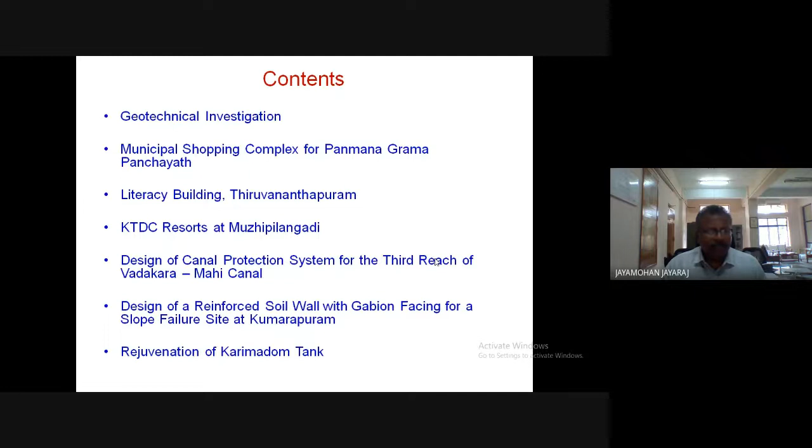This is an overview of the presentation. I'll talk a few words about geotechnical investigation initially. Then I'll share some of my experiences in projects regarding one municipal shopping complex at Panmana Panchayat, and some buildings and canals in various parts of Kerala.

All of our faculty members will be familiar with this term, geotechnical investigation. This is performed by civil engineers or geotech engineers, basically to obtain information about the properties of soil and rock at site. This information is required for various purposes — for planning construction activities, for designing the foundation, and if it is a soil structure, to design and monitor it, and to analyze the safety of existing structures.

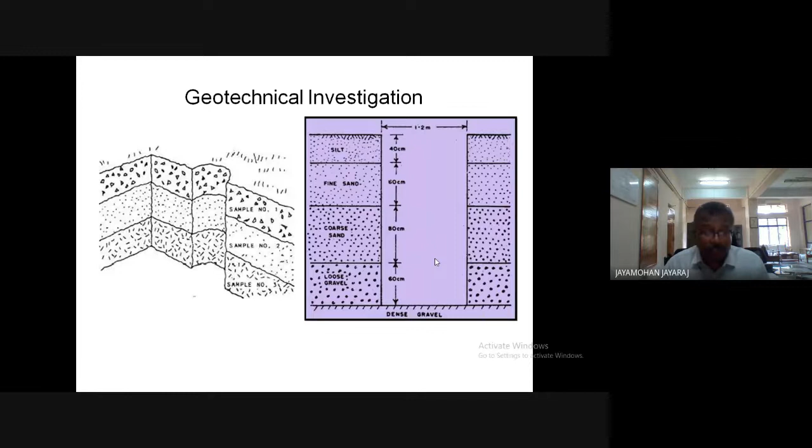Fundamentally, what we require is to know about the various layers of soil at the site. We need to know the properties, and if it is an earthquake-prone area, we also have to determine the dynamic properties like coefficient of elastic uniform compression, etc.

Usually the most common practice is we drill boreholes, take samples at various levels from all layers beneath, and do tests to find out properties. If the project is on a large scale, sometimes we may also have to go for geophysical methods of investigation. Now coming to the case studies, I'll start with a project.

This is in a district called Kollam in Kerala. It's a rural area, a Grama Panchayat — a village panchayat called Panmana. They were planning to construct a municipal shopping complex, and we were the total consultants. We did the surveying part, the initial survey, the architecture design, geotechnical investigation, and even the structure design — everything was done by our civil engineering department.

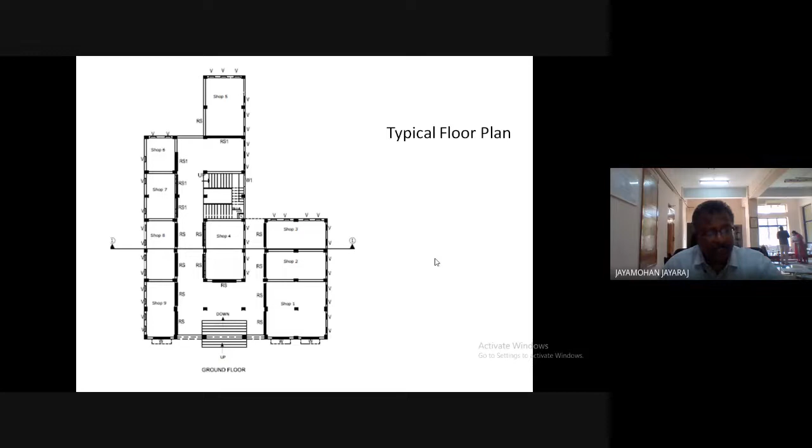So to stabilize the sides of the borehole, we use a solution made with bentonite. Bentonite is a type of clay having a mineral called sodium montmorillonite. That is the mineral in bentonite.

So we mix bentonite with water. I will show you some photographs. We mix bentonite with water to form a solution which will be circulated inside the borehole.

Can you see the movement of my cursor? Is the movement of the cursor visible? Yes sir, yes sir, it's fine, visible.

So here you can see this is the drill rod. These equipments are mounted on a tripod. Basically it is a gear drive. Here there is a main engine, and on the side there is a single gear. From that gear there are 4 belt drives. With 4 belt drives, 4 other gears are driven, and all the 4 other gears, one is for this pump.

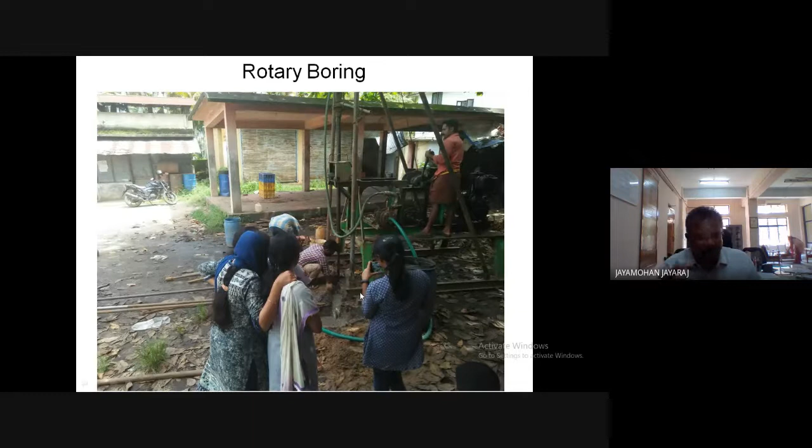Can you see the solution flowing, a muddy, grayish water? Is it visible clearly? Yes, yes. So this is a solution of bentonite. Actually the color is yellowish brown, but when it gets mixed up with local soil, the color changes accordingly.

So this is the borehole. This is a small pit, and here the solution of bentonite will be stored, and from it, it will be pumped into the drilling rod and circulated.

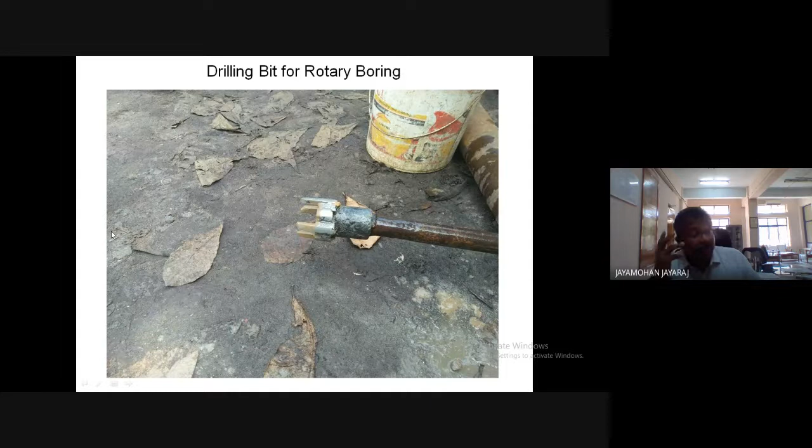So this is the chopping bit used for rotary boring. This chopping or drilling bit is what we use for rotary boring. Whereas when we have to take rock samples, we need a diamond bit, a double core diamond barrel.

What I'll be focusing on in this lecture is: once you get a soil investigation report, how do you choose the type of foundation? How do you choose the depth at which the foundation is to be placed? And how do you find out the bearing capacity? These are the 3 basic aspects I'll be sharing in this lecture.

That is, once a bore log or borehole data is given to you, how do you decide the type of foundation, how do you decide at what depth the foundation must be placed, and how do you decide the bearing capacity? These are the 3 things I'll be sharing.

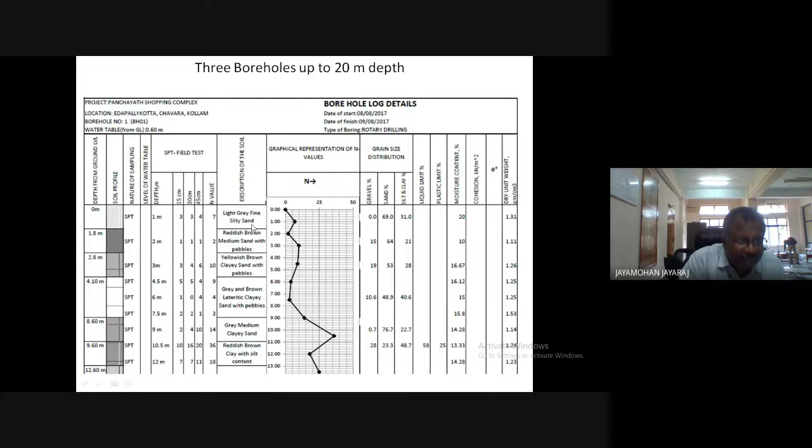As you can see, the topsoil is sandy in nature: light gray fine silty sand, reddish brown medium sand, yellowish brown clay sand. Of course this has a content of clay, this is lateritic clay sand. So predominantly it is sand, this also is clay sand but the major portion is sand.

Now you see the depth of water table, it is 0.6 meter. That is, at this level, where you see my cursor, that is the water table.

And you see the standard penetration resistance values are 7, 2, 10, 9, and 4. From 9 meters onwards it is 14, 36, 18. If you go down further, again 25, 30, more than 50, etc.

To be precise, up to a depth of about 7.5 meters, the N value is 3. From 9 meters onwards it has improved. Up to a depth of 7.5 meters the soil is loose and predominantly sandy, and it is below the water table.

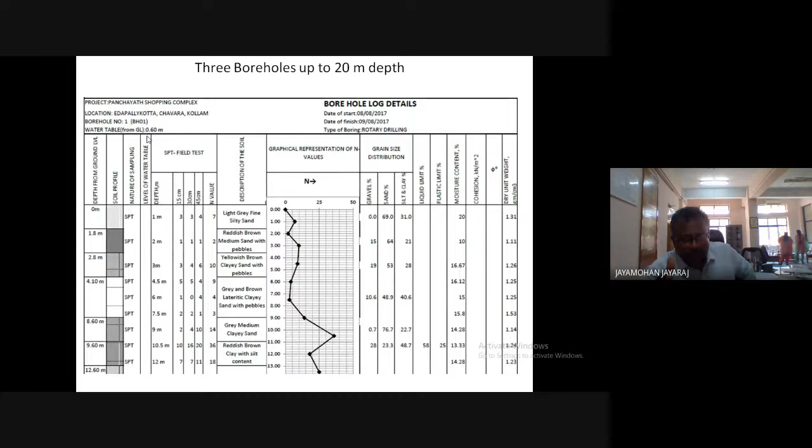So in the previous class, I hope Professor Jaya might have talked to you about liquefaction. Did she mention liquefaction in her lecture? No sir, it is not mentioned.

Liquefaction, oh sorry, I also did not include that in my slide. See, liquefaction is, when ground vibrates, that is during an earthquake, I think I will use my whiteboard for a minute. I'll share my whiteboard.

So we go back to the PPT. Here in the top layers, up to about 7.5 meter, the soil was loose. There was a possibility of liquefaction. Of course that location was not seismically very active, but you know, nowadays the geological conditions are changing.

Places which are not seismically active, nowadays they are active. Many places, especially in our state of Kerala, from my childhood I have never experienced any tremors or earthquakes, but in the recent past, even in my place in Thiruvananthapuram, small shocks and vibrations are being recorded at times. So these geological conditions are changing.

So if there are possibilities of ground vibration, then this liquefaction potential has to be reduced. We must go for compaction. So here also we went for compaction. I'll explain the process of compaction which we designed here, because here we have to compact up to this 7.5 meter depth. So we designed a system of compaction piles.

Now analysis of soil data, recommendation for foundation design. First of all, it is required to densify the soil to a dry density of 1.4 ton per meter cube, approximately 14 kilonewton, because the present density we measured was hardly about 12 kilonewton per meter. We want to increase it to 14. So once you densify, then we can place a foundation at a level of 1.2 meter. This is the method of densification.

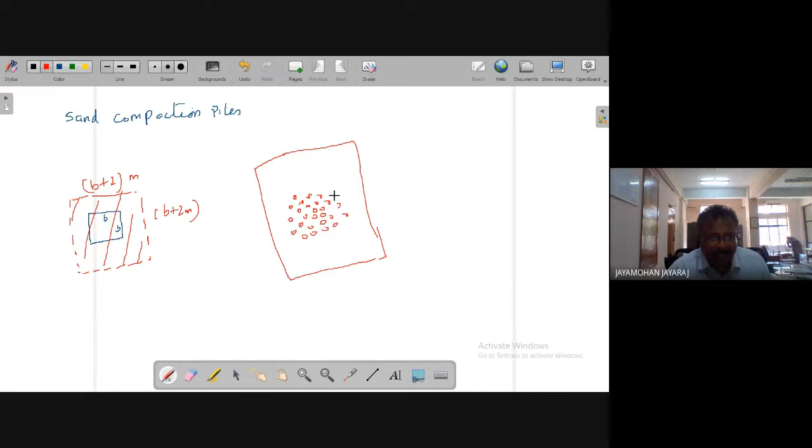We will start from the middle and work outwards in a radial fashion. Always when you go for compaction piles, we must start from the middle and work outwards in a radial fashion. If you do the reverse procedure, initially compacting the external edges and working inwards, as you reach inwards the soil will become so dense you won't be able to drive in your compaction piles.

Now I will explain the method of compaction piles. Suppose this is the ground level. Now I am drawing a section. This is the section. First, we will put a steel cone.

We will put a steel cone on the surface, and above the steel cone, we will put a hollow steel pipe. The pipe will be having joints at intervals of 1 meter. So these are the joints, and then this pipe, we will drive it down.

This pipe we will drive down using a drop hammer. So when you drive down this pipe, like this, what happens is it will push the soil radially outwards, thereby compacting the surrounding soils. So these are the joints in the pipe.

Now the next step is we will pour in a mixture of 6 mm aggregate plus sand in the ratio 2:1. So the infill material is a mixture of 6 mm aggregates and sand in the ratio 2:1.

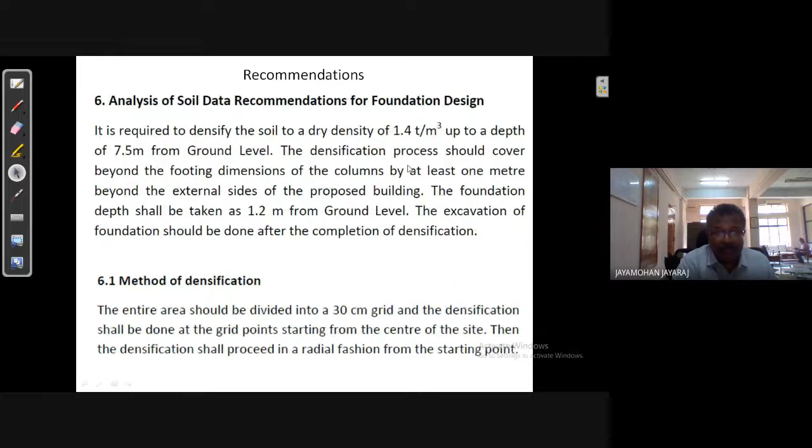So up to the 7.5 meter depth, the entire area was compacted like that, so that we reduce the void ratio or increase the density, so that the static bearing capacity improved. Also, the possibility of liquefaction was eliminated.

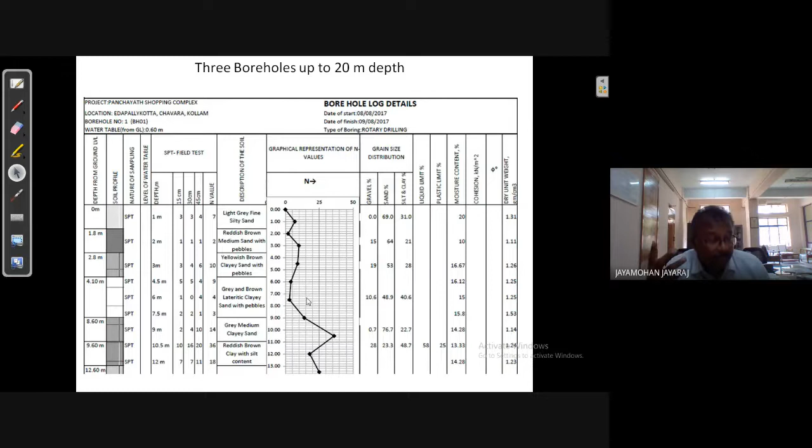So this is mentioned in the PPT. The process of densification is mentioned in this PPT. Whatever I said, I have explained it in detail. You can refer to it, this PPT will be shared with you.

Then once after that, bearing capacity was determined, and based on the density and the shear parameters measured, we got the bearing capacity as 150 kilonewton per meter square. The allowable bearing pressure has to be computed based on two criteria.

One is based on shear strength, you have to refer IS 6403, Indian Standard 6403, that is the code for bearing capacity. Then we have to check for settlement using IS code 8009, to find out the bearing pressure for the permissible settlement.

Whichever is lower, we will take as the allowable bearing pressure. So please note, we will find out the bearing capacity as per Indian Standard 6403 to find the safe bearing capacity. Then to find the safe settlement pressure, that is bearing pressure based on settlement criteria, refer IS 8009 - part 1 is for shallow foundation, part 2 is for deep foundation. Then find both values, take the minimum one as allowable bearing pressure.

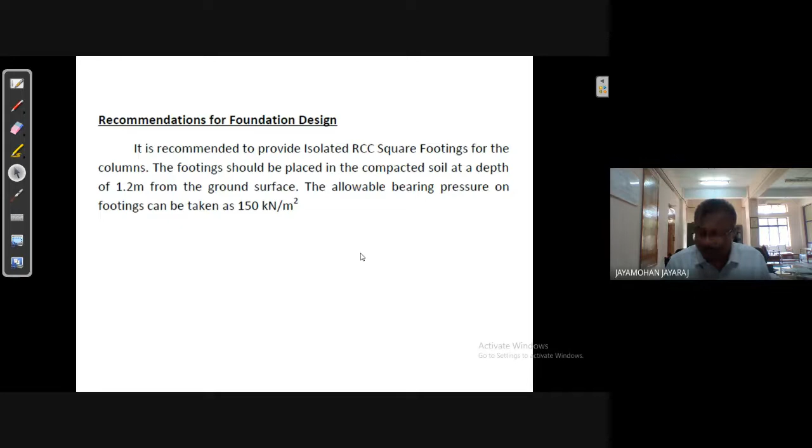That is the procedure to find out this value. Once the densification was over, we wanted to verify and check the amount of densification that occurred. So on the surface, we check density using a sand replacement cone. If you want to check the density at lower portions, you have to do a standard penetration test, but our client was not able to spend that money.

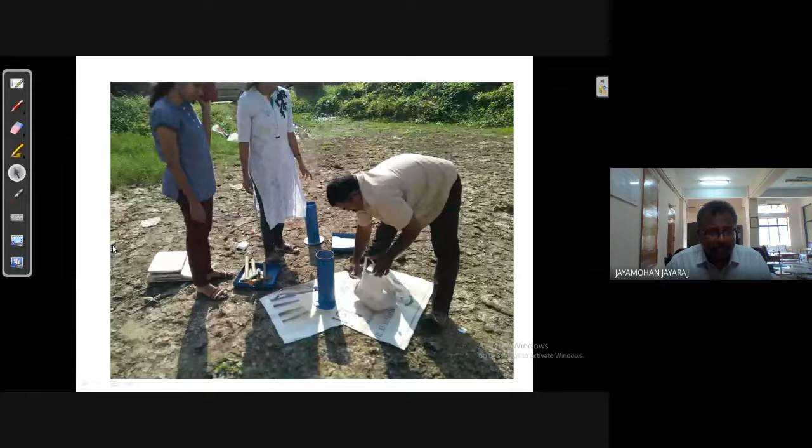And we got a value higher than 14 kilonewton per meter cube.

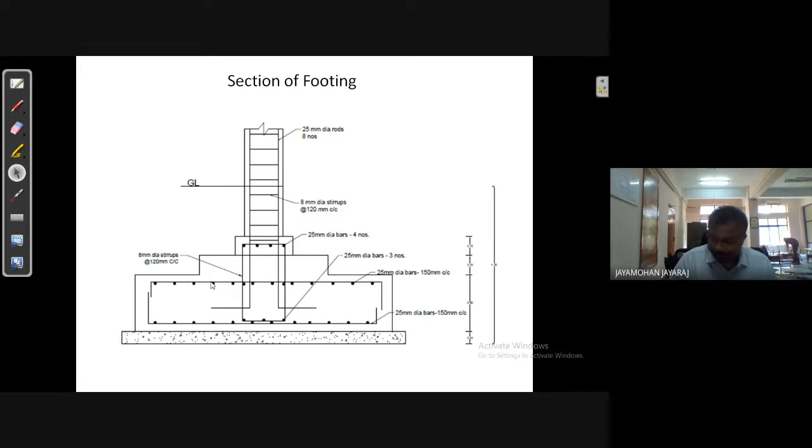Now the next project is at Thiruvananthapuram. That was a building for the literacy mission.

Sometimes there is a basic difference, you know, in how we do these practical works. The first work was given to us by a government department called Local Self-Government Department, so the people we discuss with are engineers. Now this work, it's a government project, but the government had given this project to an architect, a famous architect in Kerala.

The name of the company is called Habitat Group, headed by a very famous architect. You know, sometimes these architects fail to understand the severity of civil engineering problems.

Sometimes they will say whatever you design, whatever solution you give, must be within this much amount of money. The budget or estimate for the system should not exceed so much. This is the problem we face when working with architects, especially when it comes to complicated geotechnical problems. Sometimes, within the money they give, we may not be able to do it.

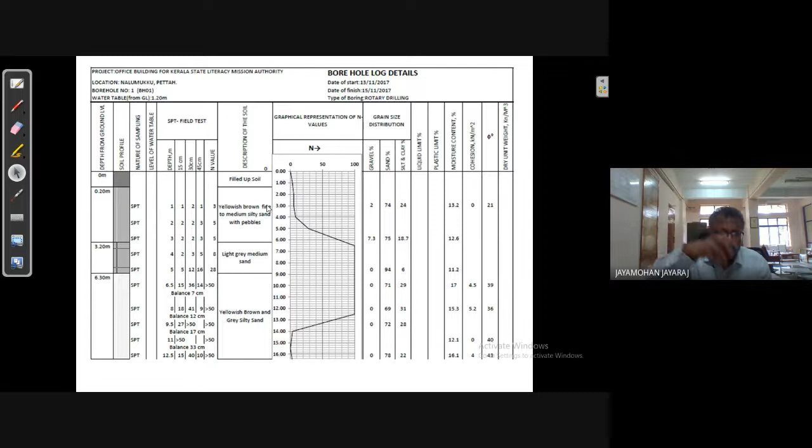Only thing, excavating for 6 meter is a problem because the water table is at a depth of 1.2 meter. This sandy soil is highly permeable, so there will be a lot of water coming in, requiring lot of dewatering. Since this was within Trivandrum city with many houses nearby, massive dewatering would cause cracks in the surrounding houses, leading to other issues as well.

So we recommended—I'll show you the recommendation. This is the rock data, you see these rock pieces. The RQD, rock quality designation, was 50, 59, which was very less and very poor. So this was disintegrated rock.

For soft rock and weathered rock, there is a design procedure as per IS 2911, which we can use to design pile foundations resting on it. Whereas for hard rock, you have to refer IS 14593—anyway, we'll see it later. For weathered rock, IS 2911 gives a procedure based on standard penetration resistance value, but usually it's difficult to do SPT on weathered rock because the value will be very high and the equipment may get damaged easily. So in case of weathered rock, we take it as dense sand with angle of shear resistance more than 40 degrees—that's common practice. Anyway, we'll see it in detail later.

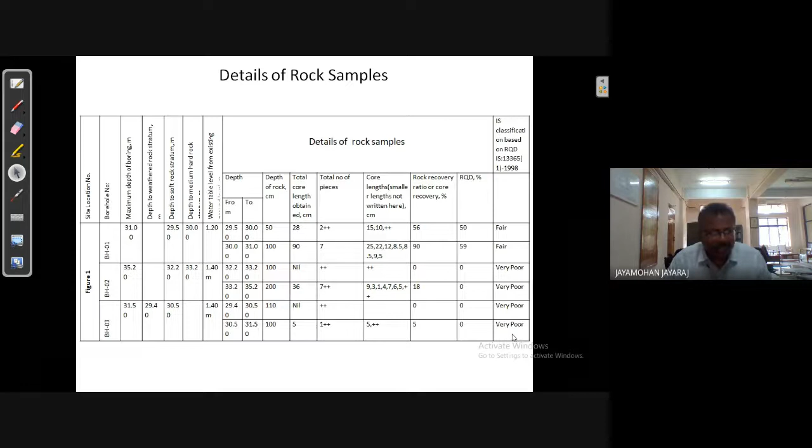So for circular footings, the method is method of excavation. You must lower RCC well rings. Do you know?

Nowadays when you make an open well, we excavate using concrete rings. I hope all of you have seen a concrete well. While installing a well, we use concrete rings, putting them one by one, and inside we excavate.

So here, to prevent the collapse of soil and to prevent large-scale sheet piling, for each foundation it is recommended that you excavate for the foundation as you excavate for a well, up to a depth of 6.3 meters, and there you can have a circular footing. You must then concrete a column, an RCC column, over that, then fill that space using the same sand from the site.

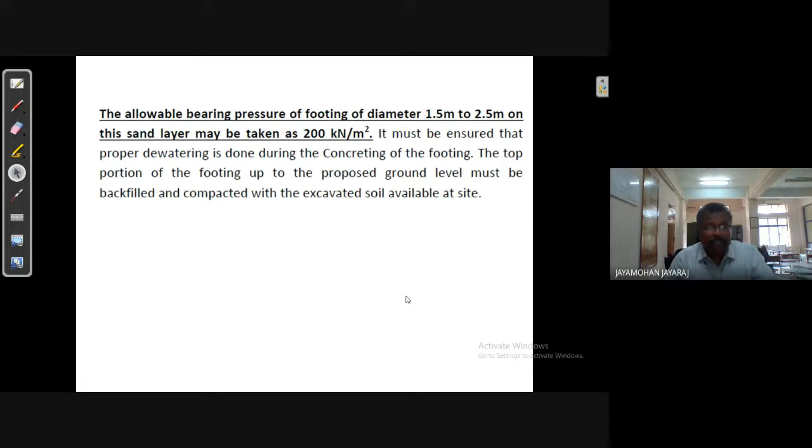So that was the recommendation, option 1, with a bearing capacity of 200 kN per square meter. Option 2 was pile foundation.

But construction like this is very difficult, especially after setting out the foundation points, when you install this well it may tilt or shift, making construction difficult. So finally the architect went for an additional estimate, and later, during the real construction, they installed piles. I gave the bearing capacity of piles also.

So here I get 2 options, but actually the best technical option is the pile foundation.

The problem is, when people apply for funding to government, based on the functional requirement they design the building, and without doing soil investigation, they assume a foundation. With that they make an estimate, make a budget, and submit it to government. Government gives some funds, and only after getting the funds do they go for soil investigation. At that time, if they see an adverse soil condition, the amount they received becomes insufficient, and they have to go for a revised estimate. This happens in many government projects. That is a common practice.

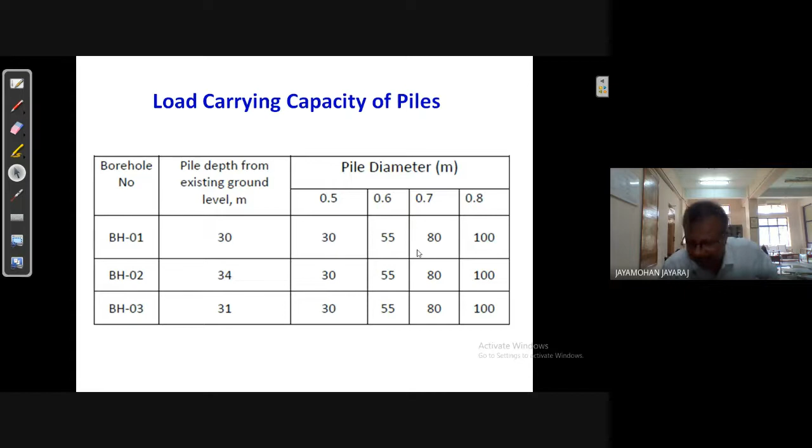Now this is another project for KTDC, the Kerala Tourism Development Corporation. They had a project of resorts at a place called Muzhuppilangadi, which is in North Kerala, near Kannur.

It is famous for something. What is this Muzhuppilangadi famous for? Those participants from Kerala, can you answer? I don't know how many of you know that. Participants from Kerala, can you put it in the chat box?

Yeah, of course. Mr. Jerison James had typed it. So there's a drive-in beach there, and that beach is very famous. So we have a drive-in beach at Muzhuppilangadi.

So this Kerala Tourism Development Corporation wanted to construct a 5-star hotel. The 5-star hotel is a 7-story structure, and all the resorts are single-story. It's a huge land, a very vast land, about more than 5 acres, which is approximately 2.5 hectares.

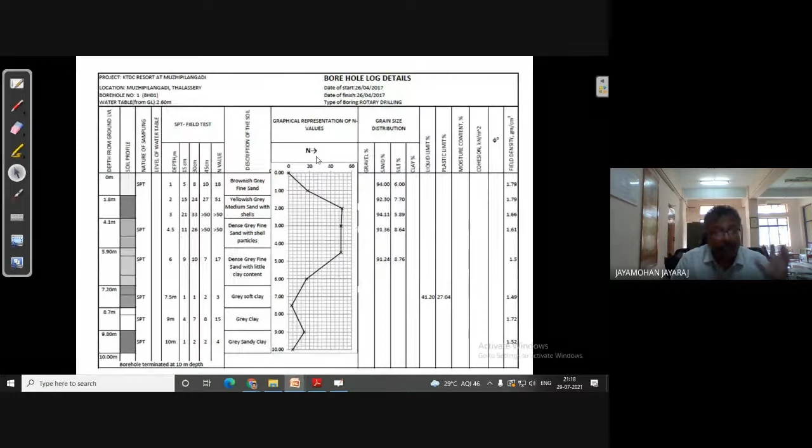Now see here, these are the bore logs which we drilled in the location of the resorts, up to 10 meters. Here also we saw similar results. From 2 meters to 4.5 meters it was dense, above and below was loose. So these are single story buildings, resorts.

Here we placed the foundation at a depth of 1.7 meters, so that the entire pressure bulb falls within the highly dense zone. That was done here.

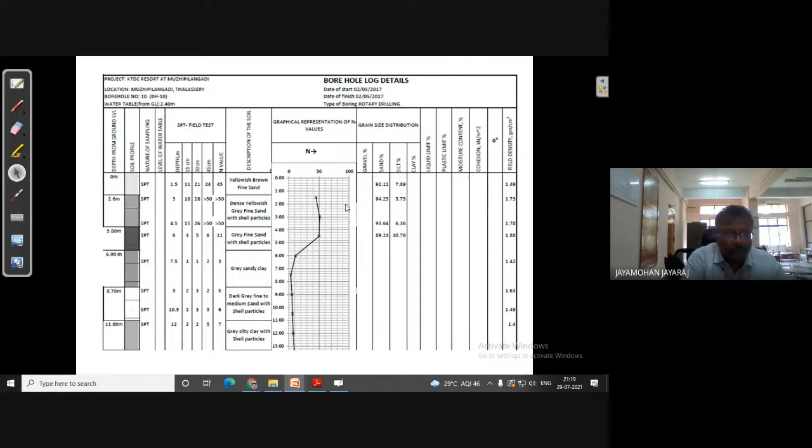And for the 5-star hotel, this is the top zone, then it becomes loose, that comes down, and at a depth of 21 meters we get weathered rock, and below weathered rock we got hard rock. So this was the data for the 5-star hotel.

Now see, this is how we record the details of rock. This is borehole 9, borehole 10. Borehole 1 to 8 was in the location of resorts, and borehole 9 and 10 was in the location of the 5-star hotel. For example, from a depth of 23.33 to 24.1 meters, that is for a length of 80 centimeters, the total length of sample obtained was 0, because that rock was in a powdered form. So the number of pieces, there is no number of pieces.

Rock recovery ratio 0%, rock quality designation 0%. So classification is based on IS 13365, this is rock mass classification. This IS code for rock mass classification, IS 13365, this is very poor. Then from 24.1 to 26.1 meters, the depth of boring was 200 centimeters, 2 meters.

We got the length of sample as 147. So 147 into 100 by 200, as a percentage, 147 of 200 is 73.5%, that is the rock recovery ratio. And there were 9 pieces. So all the lengths of 9 pieces added together will come to 147. 147 divided by 200 multiplied by 100, as a percentage, that is 73.5.

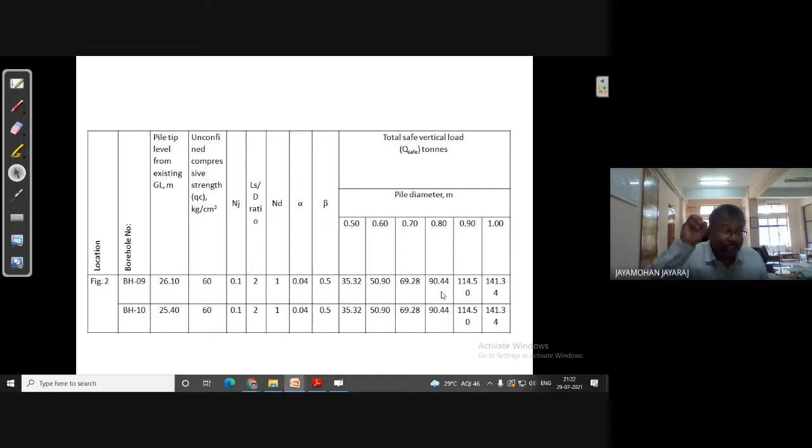Now based on the unconfined compressive strength, we calculate the bearing capacity of pile resting on rock. This is as per IS 14593, this is a different equation. That is the guidelines for piles resting in rock.

So this is the Excel sheet for that. For this, there are some parameters, NJ, ND, based on the spacing of joints, etc. There are 2 parameters, alpha and beta. LS is the socket length of pile inside the rock layer, D is the diameter of pile, so this is the LS by D ratio.

Based on the unconfined compressive strength we got various values. In this pile, in borehole location 9, in the bottom portion it was 77.22. In borehole location 10, bottom portion was 119. So 77 and 119, for design purpose we took a value of 60, and accordingly for piles of various diameters, bearing capacity was computed.

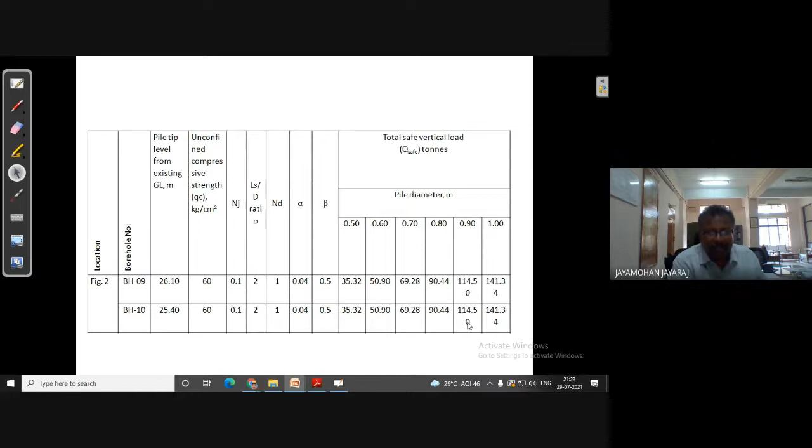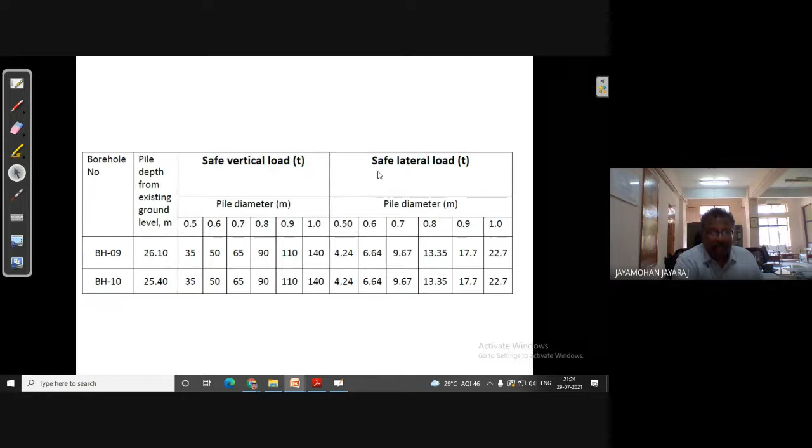Lateral load we have to calculate based on IS 2911. Uplift load based on the buoyant weight. If the pile is below the water table, based on the buoyant weight and based on the friction on sides, we have to calculate uplift load. So that is how these were calculated.

So till now we were discussing about building projects. Now we will discuss about two major projects which involved a lot of complications.

This is a design of canal protection system for the third reach of Vadakara Mahi Canal. These are not from Kerala's capital region. Vadakara is a place in the northern part of Kerala, and both Vadakara and Mahi are there.

Our state, Kerala, is a small state and very densely populated. So to ease the transport through roads, our government is very keen on developing the inland navigation system so that cargo transport can happen through water.

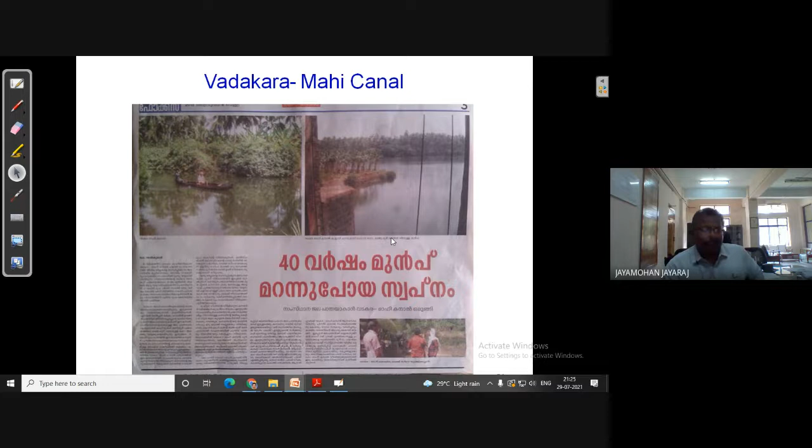This actually started long back. When I searched the internet for the Vadakara Mahi Canal, for those who know Malayalam, it was a dream which started 40 years back, and due to various reasons, mainly difficult soil conditions and budget restrictions, this project could not take off.

But now the work is progressing at a very fast pace. This was part of Vision Vadakara 2025. This canal passes through 3 assembly constituencies called Kuttiyadi, Nadapuram and Vadakara, and the total length of this...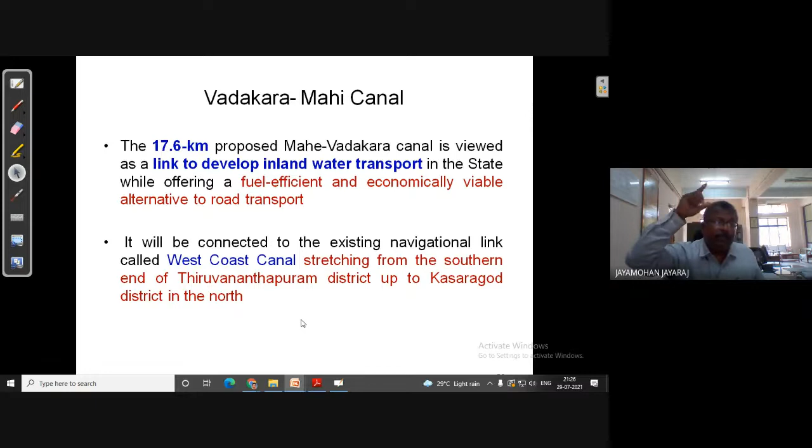An intrinsic network of canals for water transport is being developed throughout the state of Kerala, because Kerala is blessed with a lot of water bodies. This particular canal, Vadakara Mahi Canal, has a length of about 17.6 kilometers, and it is connected to the West Coast Canal, which runs throughout the length of Kerala, from Thiruvananthapuram up to Kasaragod.

The feasibility study was done by a research organization called NATPAC, the National Transportation Planning and Research Center. As per their feasibility study, up to 16.6% of total goods traffic by road can be diverted through water, making the traffic system easier and the goods transported at a more economical rate, with the cost of transportation coming down.

These are the purposes for developing the inland navigation system. Our issue is that this Vadakara Mahi Canal connects the Kuttiady River in the south and Mahe River in the north. These are the geographical aspects. The funding for this has been sanctioned by the 13th Finance Commission of Kerala State.

Now the problem: the work in the entire 17.6 kilometer stretch is going on in full swing, except for one stretch between chainage 458.47 to 459.27, hardly 750 meters or three-quarters of a kilometer. That stretch has got very treacherous soil conditions.

The soil there is very loose and the banks are very high. They are collapsible soil or dispersive soil, which as water flows, the soil gets carried away and collapses easily.

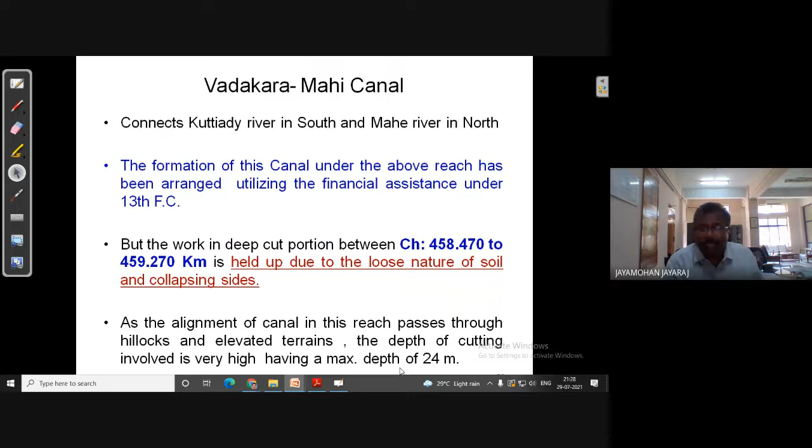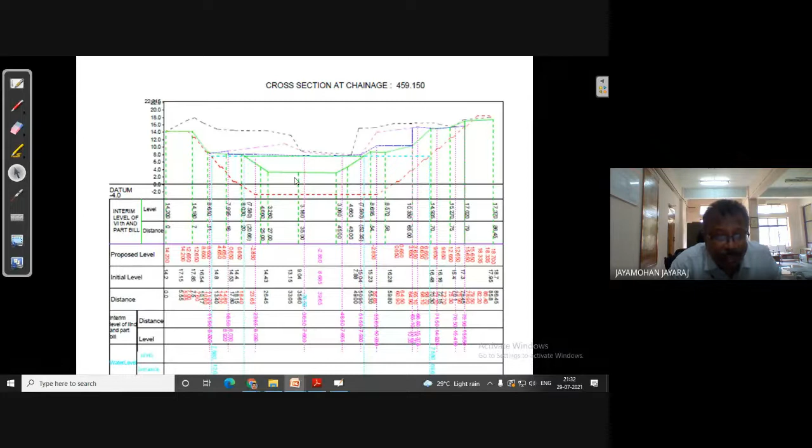That is, when they reach this green level itself, in these areas, soil is collapsing. Soil is collapsible in nature. So when you further excavate till the red line, if soil collapses here, these houses will be in danger. Definitely these houses will collapse into the canal. So the local people started agitating.

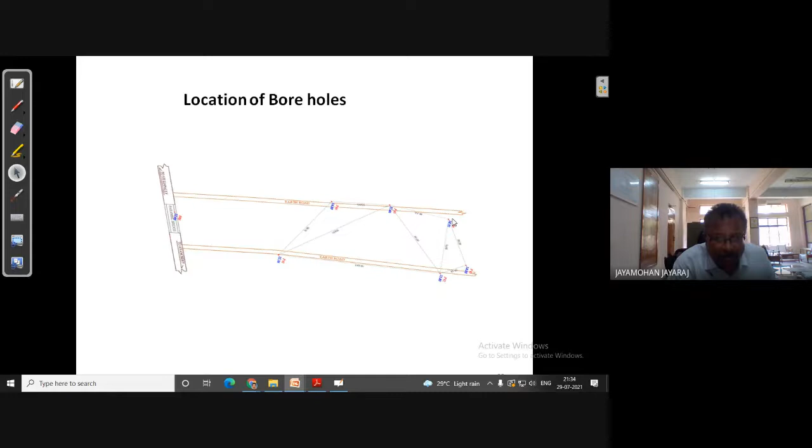This is the left bank - 2 boreholes at the top of left bank, 2 boreholes at the top of right bank, 1 borehole at mid height. Mid height means, I will show in the cross section, somewhere here - 1 borehole at mid height of left bank, 1 borehole at mid height of right bank. So like that, we took 6 boreholes.

Then it becomes quite loose, and finally when it reaches about 23 meters, it becomes hard again, and below that we get rock. So we got rock of very good quality - you can see we got RQD of 75% and all.

See, when you excavate, we can easily give a big RCC retaining wall, and above we can give a slope. We can go for slope protection with coir geosynthetic. That is, below we can give an RCC retaining wall, and above we can give a stable slope which we can protect by providing coir geosynthetic. All this can be done.

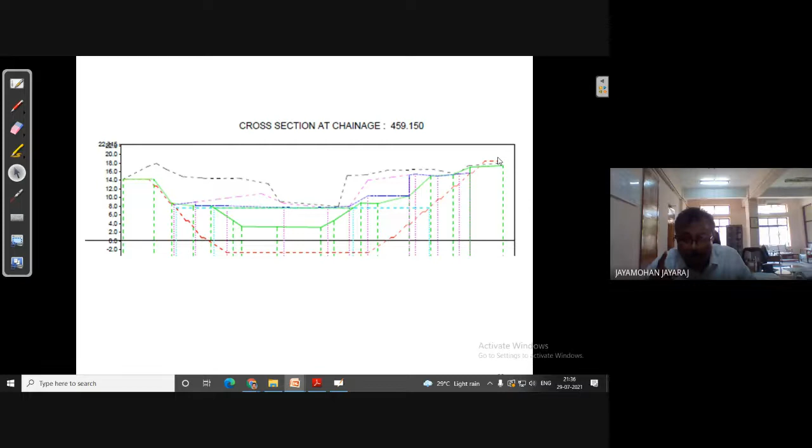So our criteria was, we had to go for... So anyway, our design criteria given by the client was that we can only do underwater concreting - we cannot go for dewatering. So that is the criteria. So even though with this height and all, an RCC counterfort-type retaining wall was possible, we didn't go for that. Initially the suggestion was to provide a diaphragm wall made of secant piles. I will go to the whiteboard once again.

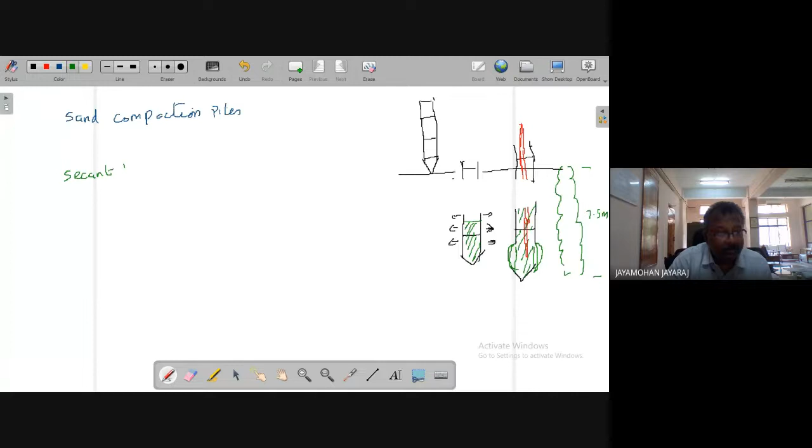So we suggested secant piles. Secant piles are piles driven close to each other, like this. There are 2 methods: either like this, suppose if you want to prevent the drainage of soil outwards, we will drive soft piles at a spacing, and these soft piles will not be reinforced. Then we will drive hard piles of M35 or M40, drilling through the soft piles like this. So these are 2 methods of driving secant piles.

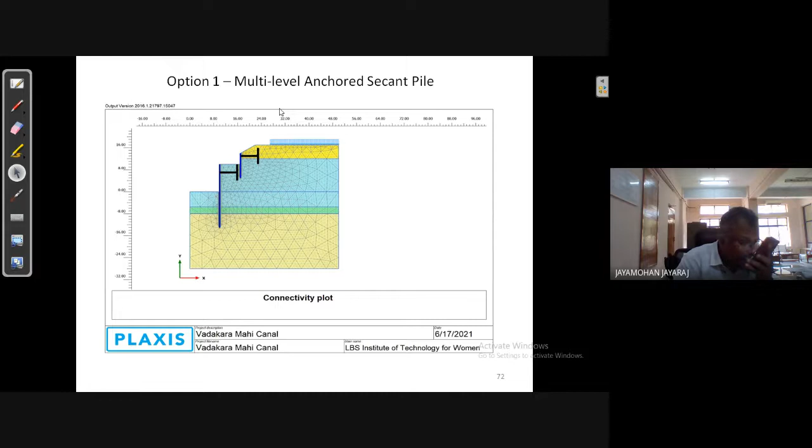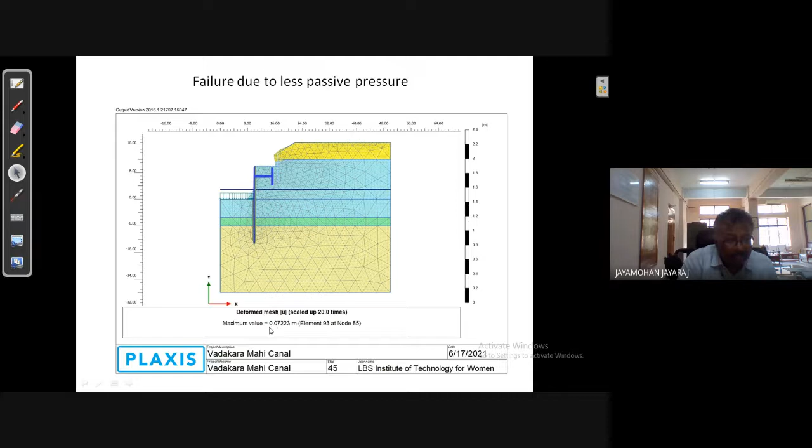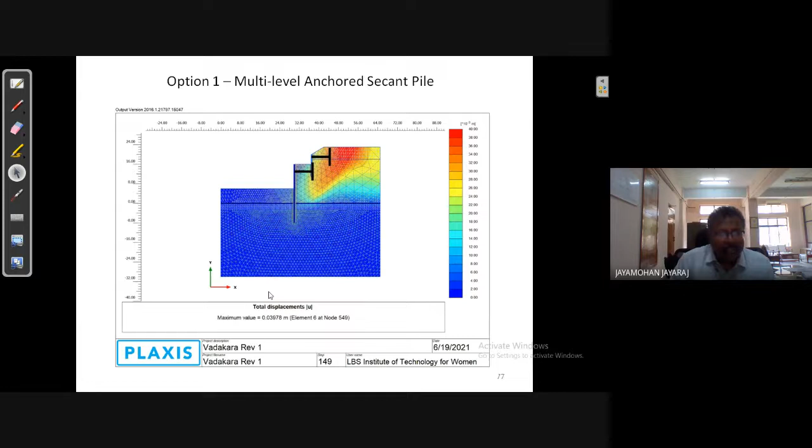But when I put geobags in front of that secant pile, the deformation reduced, you can see, to 0.039, so the deformation reduced to 4 centimeters. This is the stress distribution and deformation distribution. The factor of safety, as you can see, is 2.6. I got the factor of safety for the slope.

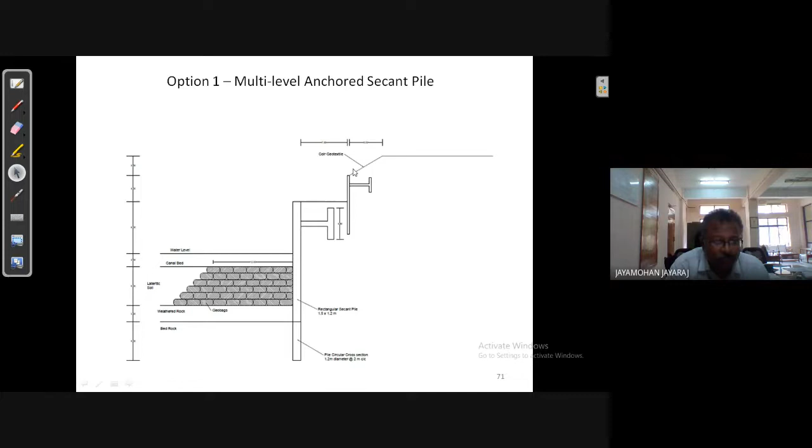But later we wanted to go for a more sustainable option, because this solution had some practical problems. After installing this dead man and the anchor, again when we go for excavation or pile driving here, this may disturb the system. So then we revised our proposal.

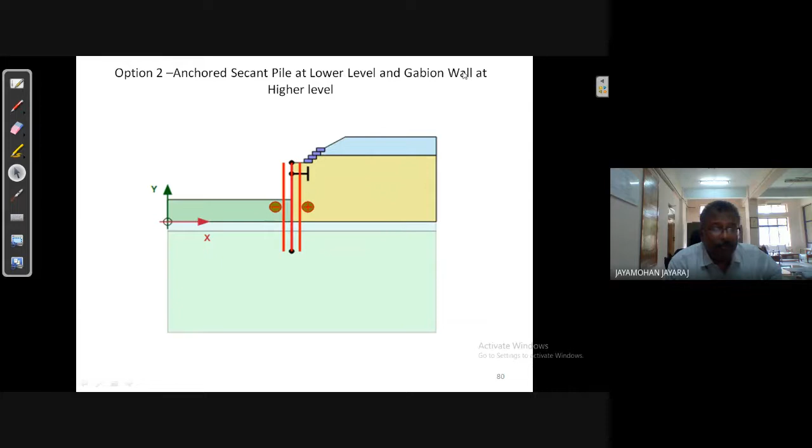In the top surface, we planned a system of gabions. I hope all of you know gabions: inside a wire mesh, we will fill in rubble, so that's called gabions. So this too was modeled in the finite element analysis with gabions. So anchored secant pile at the lower level and gabion wall at the higher level. This was modeled, this is a bigger view.

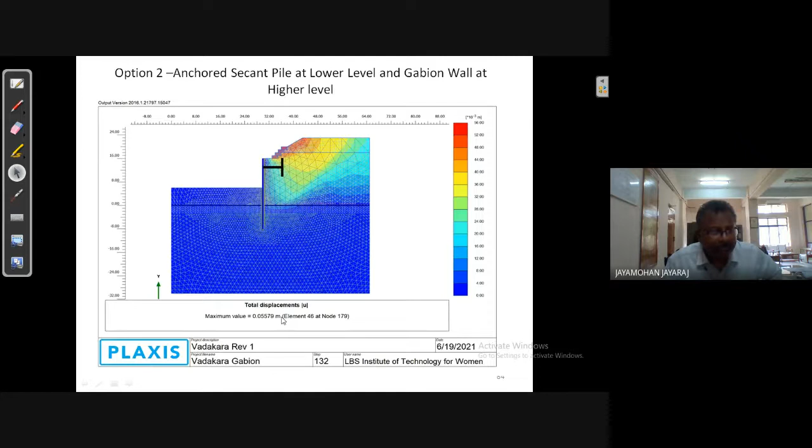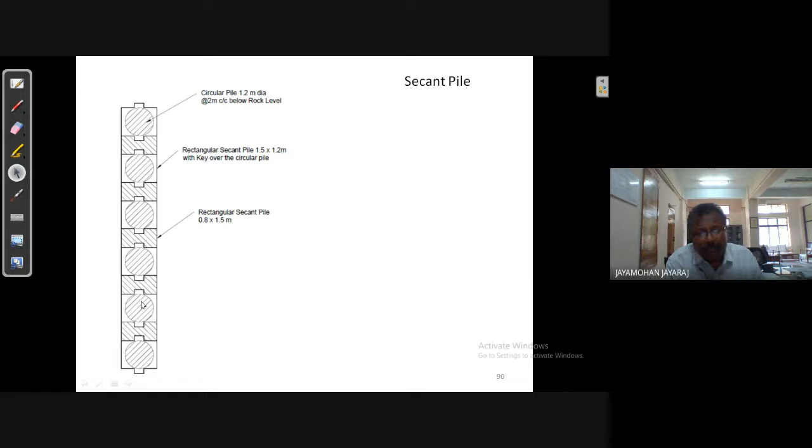The pile above that, a casing will be kept, a casing of rectangular cross section, with the keys that will be kept, and the bottom reinforcement will extend into the top portion by sufficient anchorage length. Then these alternates will be concreted separately. Then the in-between portion also, a casing will be kept. Everywhere the concreting will be using a tremie. So like this, we can form a continuous diaphragm wall. So that is how it has been designed.

Now the construction has started, it is progressing. Now, similarly, we had another project which was a bit more complicated like this. This was a reinforced soil wall with gabion facing for a slope failure site, again at Thiruvananthapuram, in a place called Kumarapuram.

So here you see, I'll use the whiteboard, just one second. First I will draw on the whiteboard, I will tell you what happened. There was a slope failure that occurred in a place called Kumarapuram in Thiruvananthapuram.

See, there in a place called Kumarapuram, there was a sloping terrain like this. And at the top, almost near here, there's a compound wall. One elderly couple was staying in a very beautiful house, a beautifully designed house by a famous architect called Laurie Baker. This house has got a lot of arches and very beautiful features and all. So one fine day, the owner of this adjacent stretch just excavates like this, about more than 11 or 12 meters. So he excavates like this.

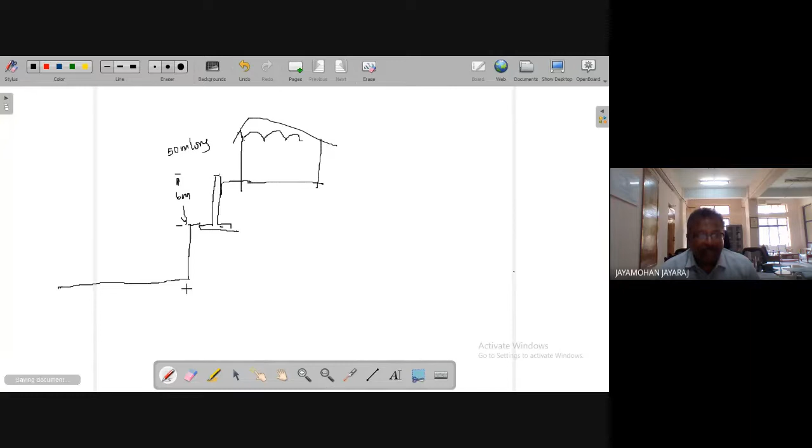So what happened? See, the problem is, people will think about only bearing capacity. How about stability? Do you think this is stable? Because now there is a deep cut in front of that. Then in the next monsoon, the entire retaining wall rotated, this retaining wall fell down, this entire soil collapsed. This house got cut into 2 pieces, this portion also collapsed. Now what is remaining is like this.

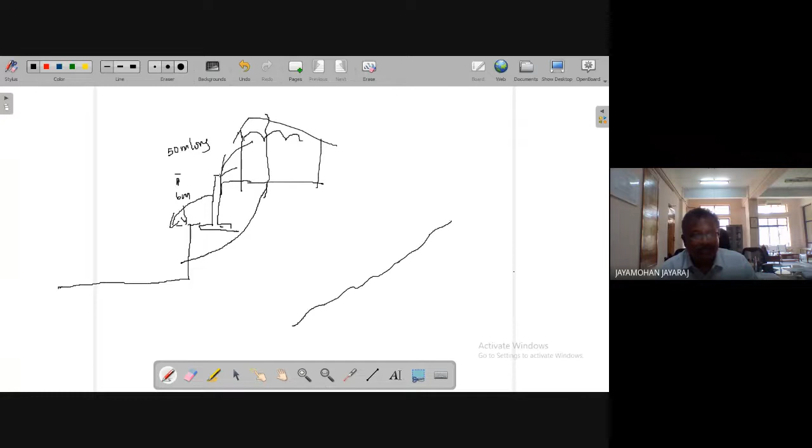The collapsed retaining wall here, the remains of the house like this. And the elderly couple, actually before this incident, the husband had passed away earlier. Now the old lady, she is still living there. This is the condition of the house.

Anyway, now I'll show you. Now this is the retaining wall, this was 6 meters high, 50 meters long, a very thick RCC retaining wall. Now it has collapsed, I'll show you. So this is the house, this is the excavation area. Now they are temporarily supported using gunny bags, temporarily, to prevent further collapse.

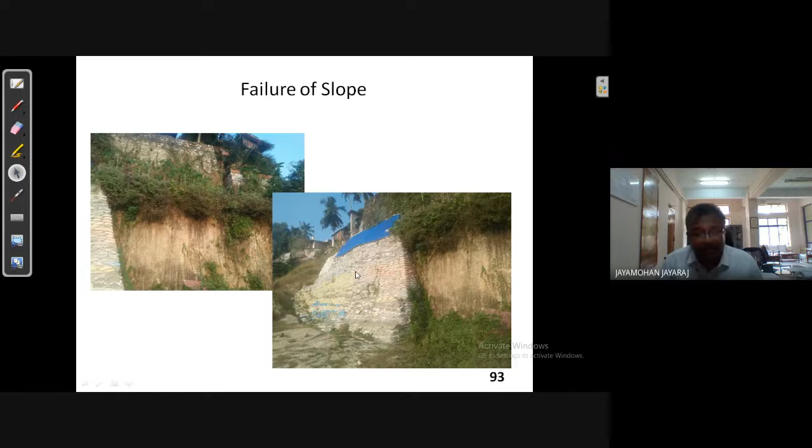Now this is the retaining wall. You can see the wall. As you can see, it is completely broken. You can see the reinforcement and all.

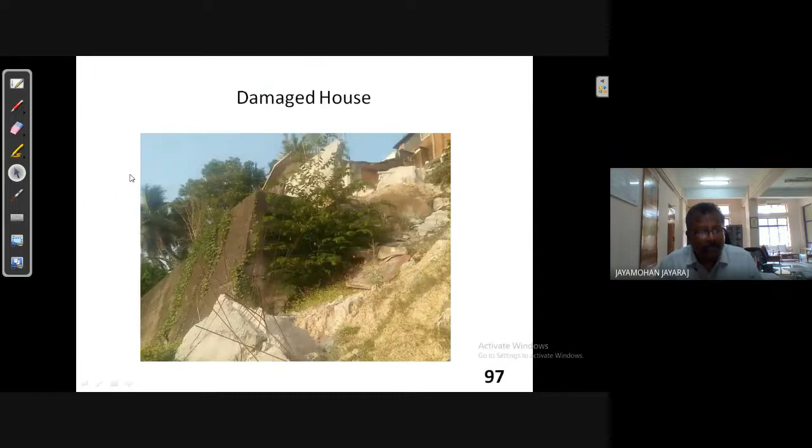Now this is the condition. You can see the retaining wall, how it has broken. So I'll show some more photographs.

It was a beautiful house, very long house. Now you can see this. So now this is the failure surface. Can you see this? This is the failure surface. So this is some filled up soil there. This is the starting portion of the RCC retaining wall which collapsed.

Can you see this? So this is the RCC retaining wall. See, this retaining wall extended from here till here.

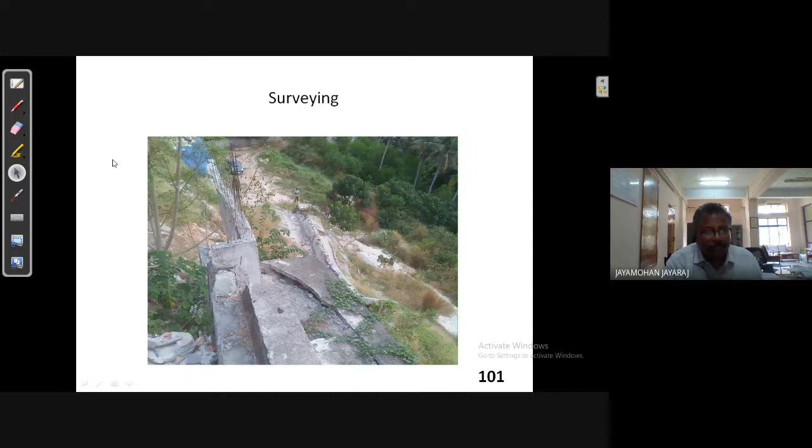Now, when you try to solve a problem, the very first thing is you must analyze the geometry. Geometry first. So first we surveyed using total station. We wanted to know the profile of the slope. Then we plotted the contours using software LISCAD. This is my colleague, Professor Arun. He is surveying. So we took 2 or 3 sections in this.

Now this is the profile of the surface. Top portion is the failure surface. You see this inclined portion? This is the collapsed soil from the top portion, which is just lying at an angle of repose.

I'll go back to the figure. So the soil which was here originally fell down. Now this is lying at an angle of repose. Now this is the failure surface. This failure surface extends down like this, extends down and comes up.

Now our issue is the reconstruction of this project. So we wanted to start, now this area, approximately this portion was the boundary of the land, the boundary of this property, the property of this person. So we had to start constructing, we had to construct a retaining wall here.

See, total 17 meters. So here soil is loose. We had to further excavate. If you excavate till hard soil below, this loose soil will again collapse and the existing house will come down. That also will collapse.

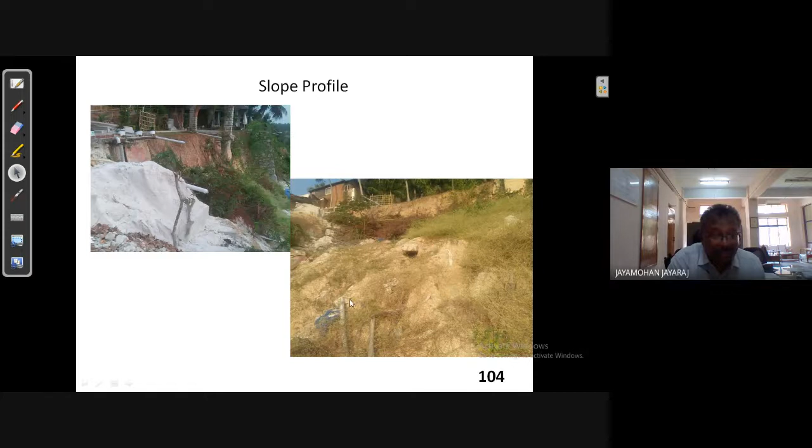So this top surface, you can see in this photograph, this is the portion and this is the soil lying at angle of repose below the top portion.

What we did was, definitely for constructing a new retaining wall, we have to excavate. Now before excavating, we will have to stabilize the slope. Because without stabilizing, if you excavate, this will collapse. So what we did was, first this much portion,

We proposed to stabilize using soil nails. First, this much portion we proposed to stabilize using soil nails. Then you must excavate here for just 1 meter. Then that 1 meter also you stabilize using soil nails. Then excavate the next 1 meter, that also you must stabilize using soil nails. Like meter by meter, excavation, stabilization, excavation, stabilization. Like that, you must proceed up to the required depth.

Once this is stabilized, then we can construct a 3-tiered reinforced soil wall to reclaim the land. So first, I repeat, first you stabilize this vertical portion. Then 1 meter will excavate, that 1 meter will stabilize. Then the next 1 meter will excavate, that will stabilize. So excavation, stabilization, alternatively, we will proceed up to required depth. Once you reach the zone of hard soil, from there we can construct the retaining wall in 3 stages.

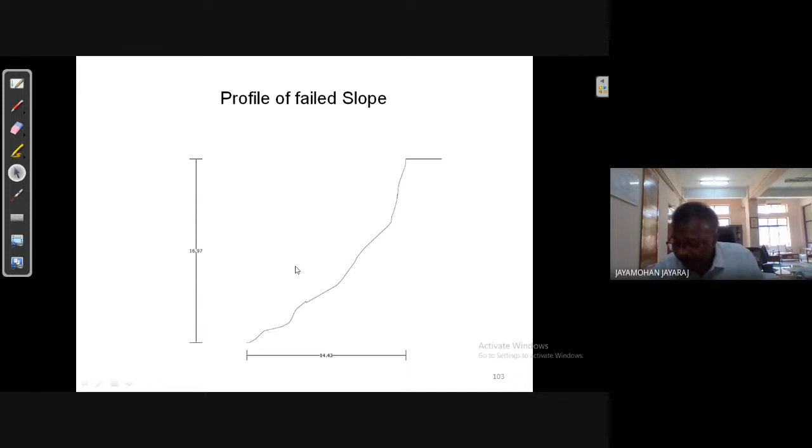A 3-tiered wall. I'll show you the figure. The wall we designed, I'll show. So of course, we did soil investigation.

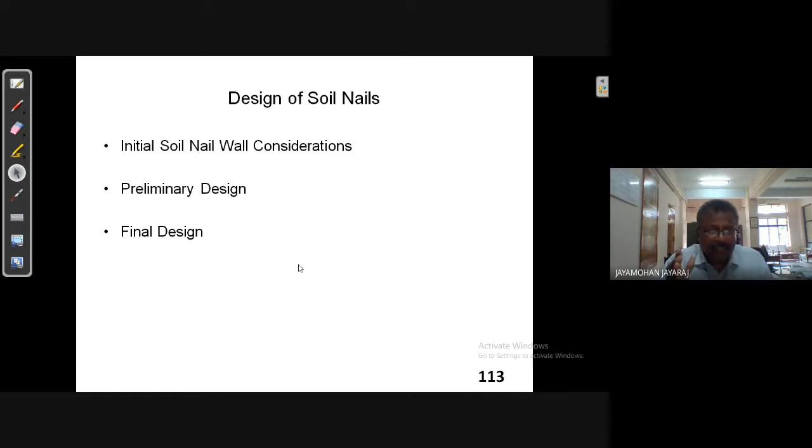Now the design consideration, I think I explained this just now. In the design of soil nails, there are 3 considerations: initial soil nail wall considerations, then preliminary design, and final design. In the final design, we design the facing system. Here, facing system was not required because after doing soil nailing, we had to again fill up soil for the retaining wall.

So in the initial soil nail wall considerations, the parameters are the wall layout. That is, we will finalize the height of wall, length of wall, then the slope of soil above the wall, the back slope, then the wall face, the inclination of the wall face. Then we will decide upon the spacing, which ranges between 1.25 to 2 meters. But in this project, I took it as 1 meter.

It can be square pattern, staggered pattern, or irregular. We chose square pattern. Inclination can be between 10 to 20 degrees. We chose 15 degrees. So all this we choose arbitrarily, based on experience. Then we have to calculate the soil nail length.

To calculate soil nail length, first we have to decide upon the material, what type of construction mechanism, what type of drilling you are going to do, what type of grout you are going to use, and what is the soil type. Based on this, we can know the bonding strength. Based on the bond strength, we have to find out the soil, and based on the tensile force coming at each level, we have to find out the diameter, etc.

So for a specific drilling method and soil condition, we have to find out bond strength. This is available in literature. I referred a book published by Central Board of Irrigation and Power, edited by Dr. G.V. Rao. I will share the details of the book later.

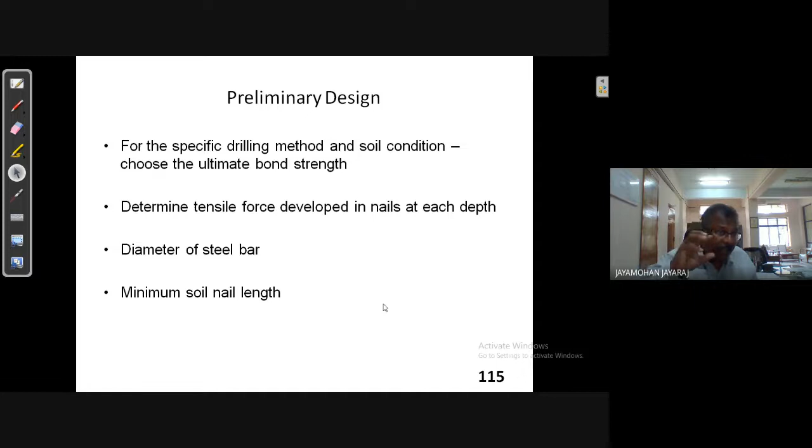Then, based on our conventional principles of soil mechanics, we will find out the tensile force in soil nails at each level. Based on the tensile force, we will decide upon the diameter of the steel bar of the soil nail. Based on the force acting and the bond strength between soil nail and surrounding soil, we will determine the surface area. From the surface area, we will find out diameter and length of soil nail. So this is the criteria.

Now at various depths of soil nail - 0.75 meter, 1.75, 2.75, 3.75 - we will find out the axial force. We will draw the active wedge, and based on that we will draw the active pressure diagram, the active earth pressure diagram. Based on that, we will find out the pressure at each level.

Then, based on the diameter of steel bar, we will find out the tensile capacity, which is same throughout at every level. Then, let me go to the whiteboard once again.

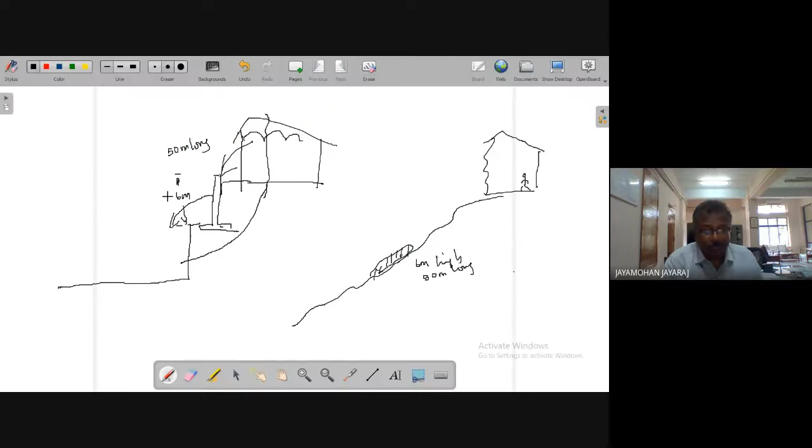Now see, this is the soil surface, and these are the soil nails at various levels. And you see, this is the active wedge. When the wall moves, this is the active wedge.

Now see, in the top soil nail, the soil nail within the active wedge is not effective. Only the soil nail behind the wedge is more effective. So in the top soil nail, this length is very less, so the pull-out capacity of this will be minimum. As you go down, the length beyond the active wedge increases and pull-out capacity increases. Pull-out capacity will be maximum for the bottommost reinforcement. So that is the concept here.

So you see, the pull-out capacity for the top is less, and as you go down and down, the pull-out capacity increases. So between tensile capacity and pull-out capacity, whichever is minimum is taken as the allowable capacity of soil nail at that particular level. Is it clear? So this is how we find out the allowable axial force carrying capacity of nail at various levels.

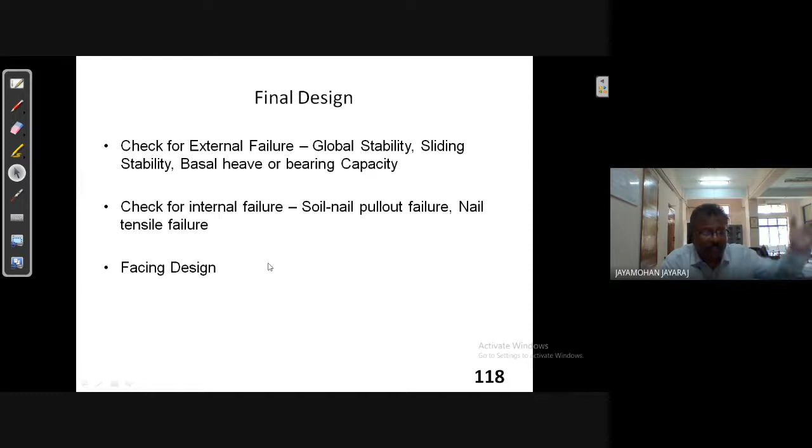And facing design, in this project, facing was not there, because immediately after the soil nail, we had again a retaining wall. So these are the design results.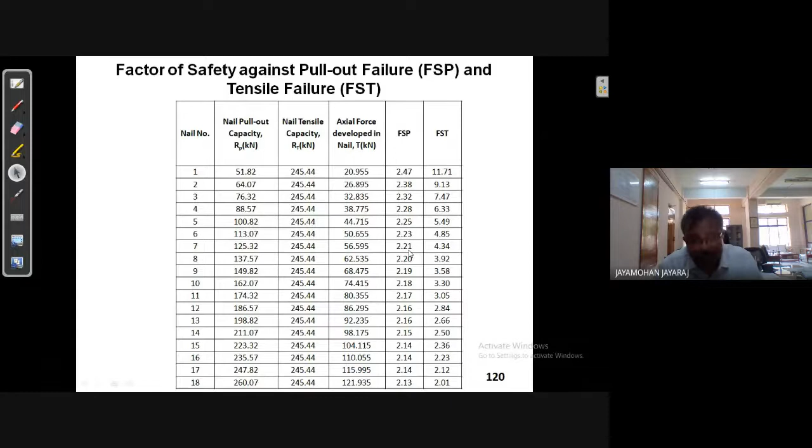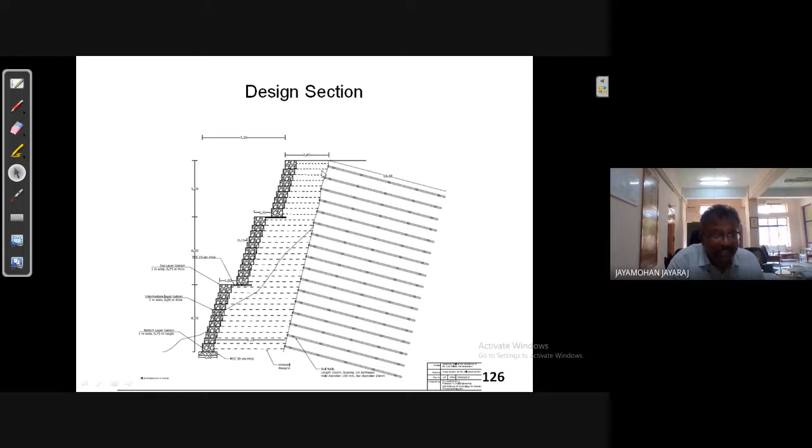So this is the actual section. We gave an inclination to add more factor of safety. This was a 3-tiered reinforced soil wall with gabion facing. I'll come to the details of that. This is a gabion face, so this is a reinforced soil wall.

Again, similarly, we had to check for external stability and internal stability. External stability is similar to an ordinary retaining wall: sliding, overturning, bearing pressure. Internal stability required checking for tension failure of geogrid and pull-out failure for geogrid. We chose uniaxial geogrid of tensile strength 200 kN/meter, spacing 50 centimeters.

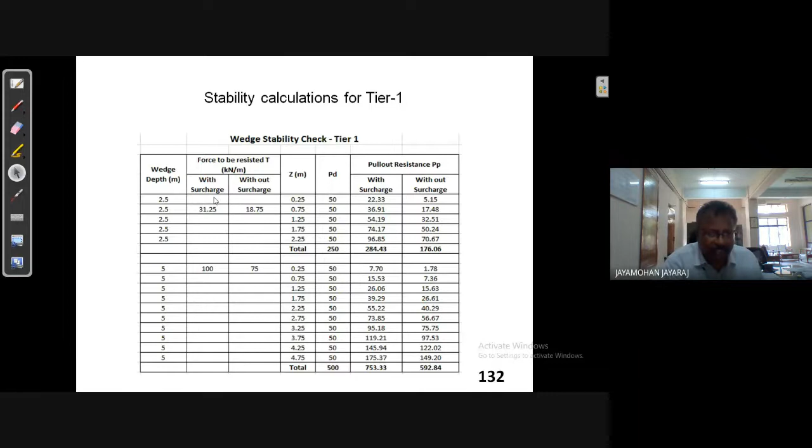Now, this is to check the pull-out stability. We have to consider various wedges within the soil, and using Excel you can do it. Everywhere we got good factor of safety. There was no issues. Now please listen.

Now this is the front 3-tiered wall. See here, this is reinforced. For reinforcement, there should be a minimum length — this length should be at least 70% of the height. Whereas here the length was less.

As you can see here, this is a geogrid reinforcement. Alternate geogrids were fixed to the soil nails using a mechanism I'll show you. See, this is a soil nail — there are 2 plates, not clearly visible. In between the plates, we will pass the geogrid and bolt it.

As you can see, alternate geogrids are attached to soil, anchored to soil nails, while the other alternate ones act like reinforcement. So in the soil nail design, we had to consider the axial force from the geogrid as well, which was considered as an additional tensile force.

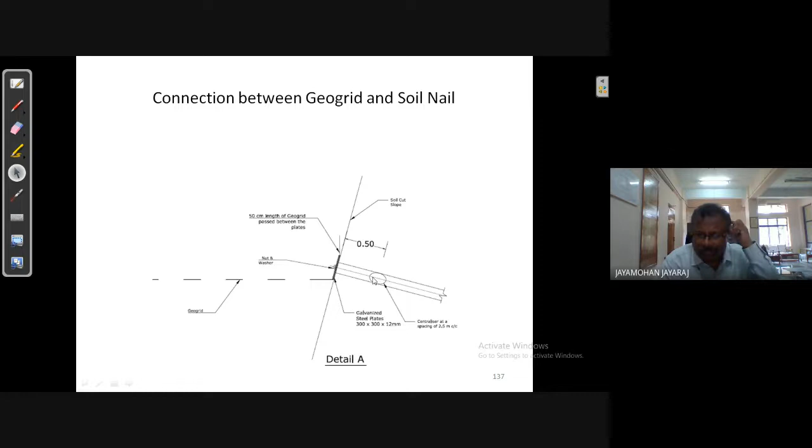And see, these are inside — this line is a steel rod, surrounding portion is grout. These are not centralizers, sorry, these are centralizers, similar to cover blocks in RCC to ensure clear cover. Here, to ensure proper cover, we put centralizers made of PVC to ensure the reinforcement is exactly at the center of the grout hole.

Now this is the modeling. Soil nails were modeled as embedded beam rows. This was modeled using Plaxis 2D, with soil nails modeled as embedded beams.

You can see these green and violet lines — these are geogrid reinforcement, alternate geogrid at the level of soil nail. Alternate geogrids connect the gabion wall and the soil nail.

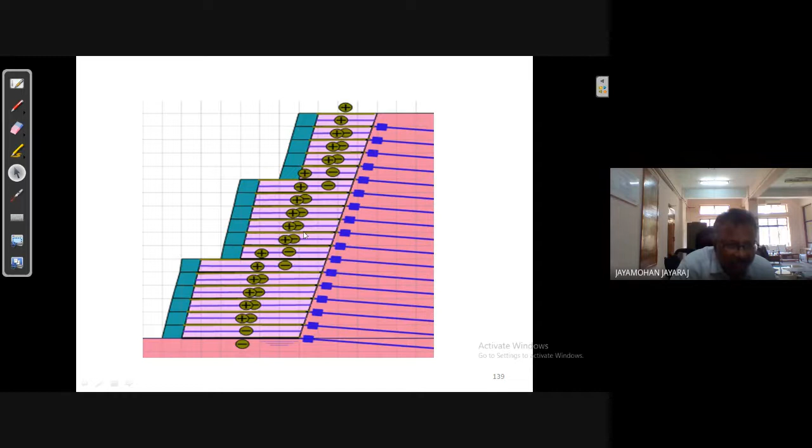The geogrid connecting the soil nail and gabion were modeled as node to node anchors, whereas alternate geogrids were modeled as geogrid reinforcement itself. These plus and minus signs are the interfaces — plus is the top interface, negative is the bottom interface. These gray lines are actually interfaces, coinciding exactly above those anchors, so the anchors are not visible in this figure.

Once analysis was done, we found the axial force in the nail was about 22.4 kilonewton. That was the actual force in the nail, and it was well within our designed force.

These are bending moments. Actually, soil nails are designed only for axial force, not for bending moment, but the bending moment magnitude was very small, because small vertical movements could cause some side bending, since this soil nail was attached to the geogrid as well. So vertical movements in the front wall may cause shear and bending in the soil nails, but they were very small and negligible.

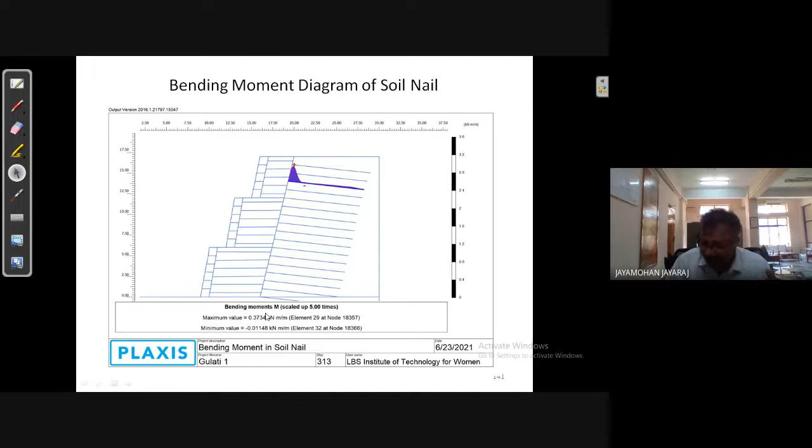Now, these are the stresses acting on the geogrid, along with some other parameters, including the shear stress on the geogrid.

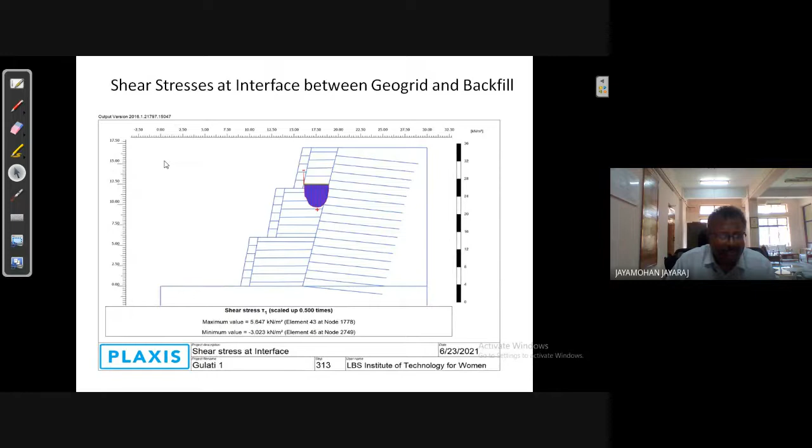But when it came to budget, there was a problem. The architect - this work also came to me through that same architect - said the entire budget must be within 1 crore.

It is such a complicated situation. See, for a building project, based on a budget, you can accordingly design the building - you can increase or decrease the plan area, or choose the type of finishes or materials used. Based on your budget, you can plan a building. But a geotechnical problem like this, we cannot design based on your budget. So this became a big fight between myself and the architect.

The architect said, this is a government project, I am sure the finance minister will scold you. And the architect said that he would not present this before the finance minister - he told me to present it instead.

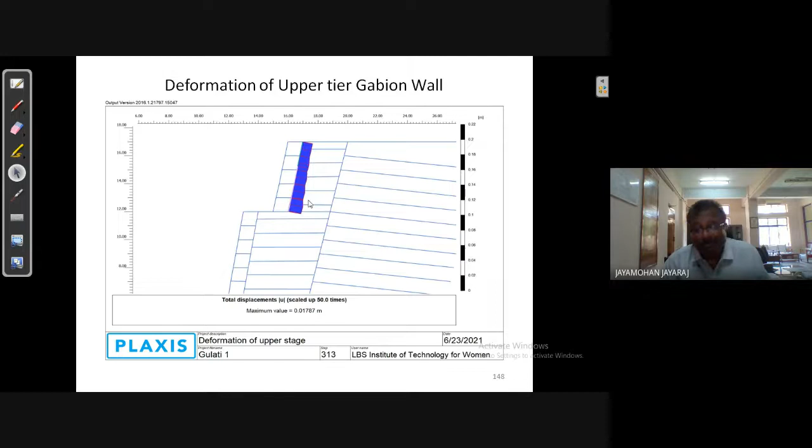I went and presented. Till this slide, the finance minister was very happy. But when he saw this slide - do you know what the minister said? He said, 'Ayyo.' And you know what he said? Mr. Jayamohan, with...

2.64 crore rupees, I can purchase another piece of land. I can construct a beautiful house for this lady. Now you are asking this much money just to construct a compound wall. Do you think, minister? So the minister said, see, with 2.64 crore rupees, I can buy another piece of land in Trivandrum, and construct a house also. Just for the reconstruction of a wall, you are asking this money.

I said, I agree with you. But if you abandon this project and buy another piece of land and construct a house, this lady may be happy. But year after year, as monsoons come and go, more and more soil will collapse. This failure surface will further expand. Then this house will collapse. Then this threat will get transferred to the neighbors - the people staying further uphill will also face this danger. At some point of time, you definitely have to address this problem. Later, this may grow into a geological issue. So you must arrest it now.

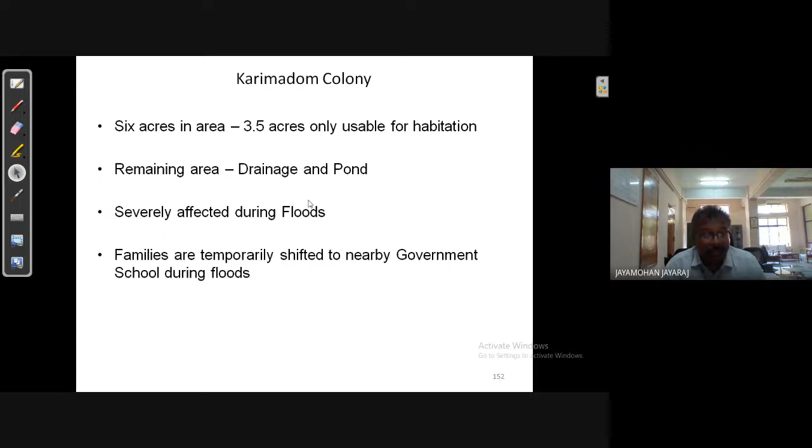There's a colony in Trivandrum known as Karimadom colony. It's about 6 acres in area, a low-lying area with a pond. This pond got completely filled up with a lot of vegetation and dirt, and it got silted up.

This pond is supposed to act as a flood cushion. During floods, water comes and gets stored there, so that some of the flood waters this pond has to absorb. But it got silted up, and now it's no longer a water body. People are throwing debris inside it.

So government wanted to remove the silt, desilt it, and make it a pond once again. RITES made a study, but unfortunately, as per their proposal, they proposed to drive sheet pile walls for the desilting. Sheet pile is very attractive when you see it, and the budget was...

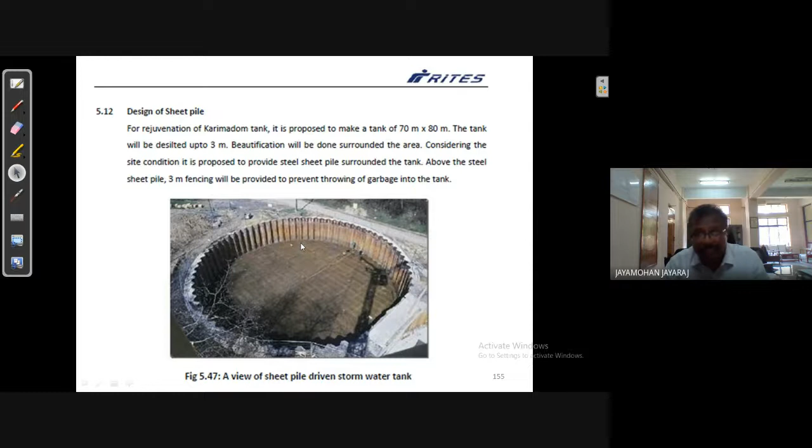Very soon, I gave them a very simple solution like this, because you just give a stable slope. If there is any limitation in area and the entire area is required, then we may have to go for sheet pile. But here there is no limitation, the area is available in plenty. So I told them to just provide a stable slope to the banks, reinforced with coir geosynthetic for stability.

Inside, this is woven coir geotextile of 700 GSM, meaning grams per square meter, with 12.5 opening size, and the lengths were designed. On top, for surface protection, one layer of non-woven coir geotextile, and over that a woven geotextile, over which we will plant vetiver grass.

The initial proposal costed 3 crore rupees. This costed hardly 30 lakhs. The comparison shows savings of 90%. 300 lakhs became 30 lakhs. Sometimes, solutions can be costly.

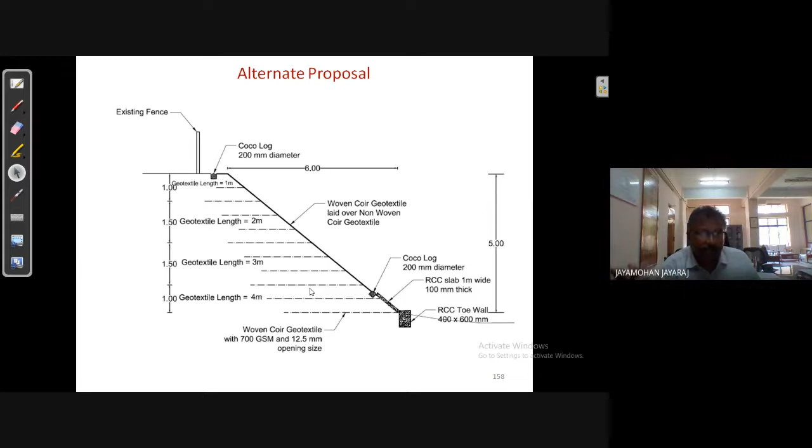Always please look at the feasibility of the solution. Whatever is required, only that must be given. Unnecessary wastage of money is not recommended.